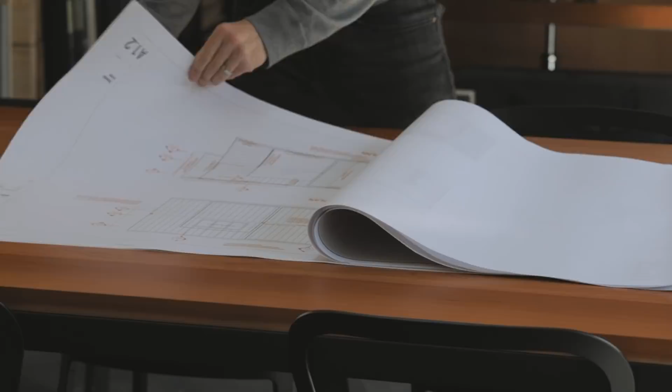I'm a sole practitioner, which means I'm responsible for everything here, bringing in new work, processing that work through the design process, completing it, and all the meetings, emails, invoicing, all those things fall under my responsibility. As a sole practitioner, you have to maintain this kind of careful balance between new work, work that's in progress, and work that's finishing up.

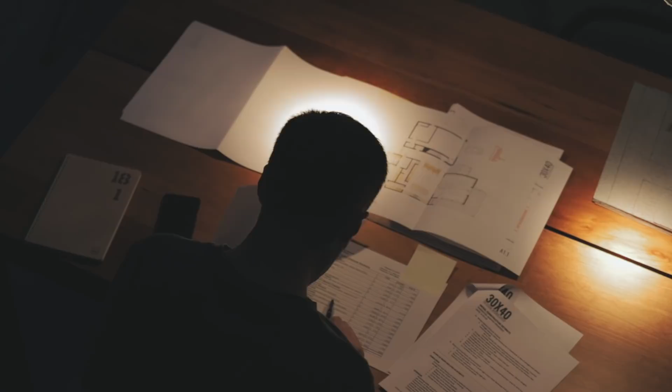When there is creative work that's extrinsically motivated, that is work that's commissioned by others, external to you, there's a natural cycle to that work. People will delay projects. Financial situations will change, personal situations will change. And if your entire creative life is tied up in those extrinsic motivations, when something is delayed, you'll need to fill that hole in with something else. And that can be a struggle.

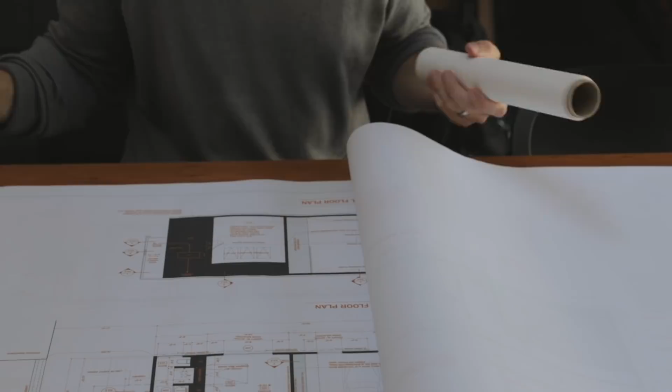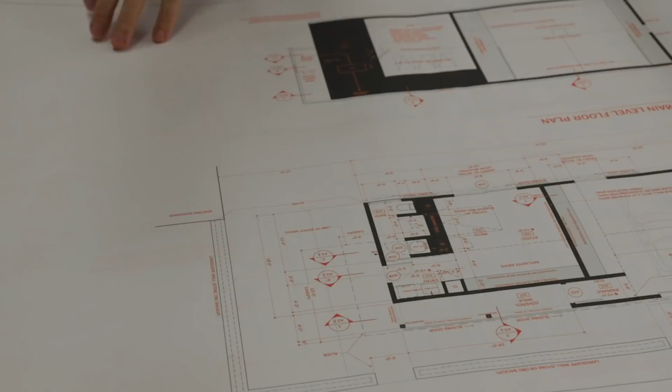So finishing up this barn studio project, this is actually going into construction right now. They're casting the slab this week. So we had some framing members to figure out, some coordination to do on these eave details here. It was done as a schematic set, and we now have to figure out what some of these details at the corners are. So it's not uncommon to do a set of details for a schematic or design development set of drawings and then have to return to them to do some additional detailing.

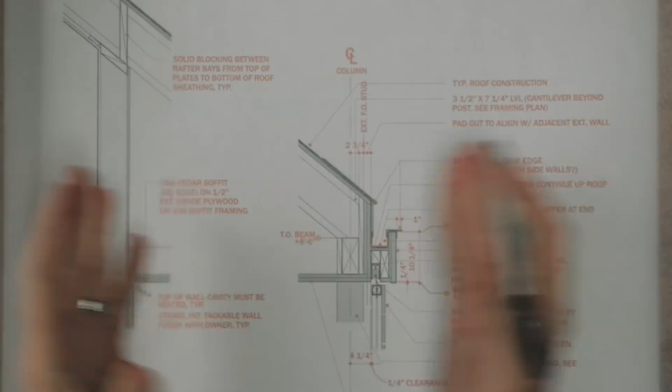And this practice is called detailing because it's describing all of the parts and pieces and materials and components and dimensional requirements that the contractor is going to need to actually construct the structure in the way that you're intending them to. So if we just return to the drawing set here for a moment and we look at a framing plan for this particular area, it's right in this zone in here.

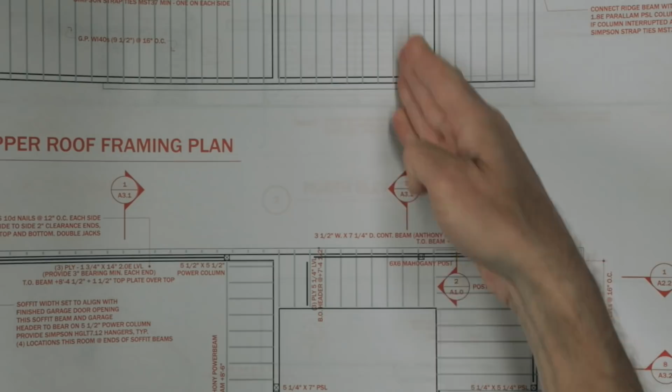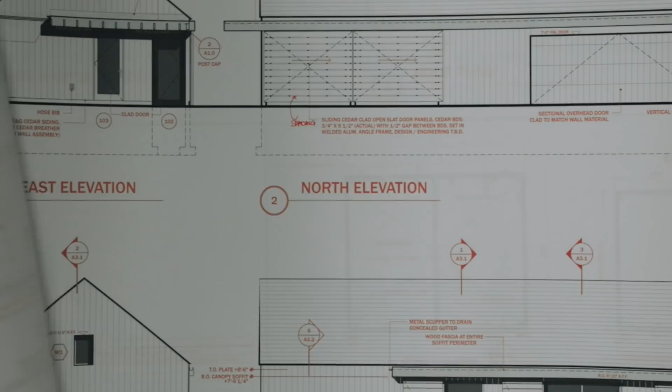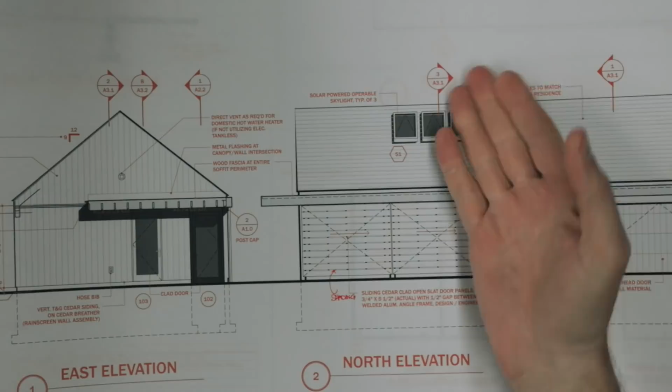So if we come over to this elevation right here, if we're cutting a section through here, we have some sliding barn doors, we have a fascia here, we have roof shingles that are turning down to a vertical wall, we have cedar siding, we have a covered canopy. So there's a lot of things happening in this zone that is not apparent until you go into a deeper level of detail. So the purpose of this detail is to basically say, okay, these are the parts and pieces that make it up. But detailing is also a process of figuring out sequence.

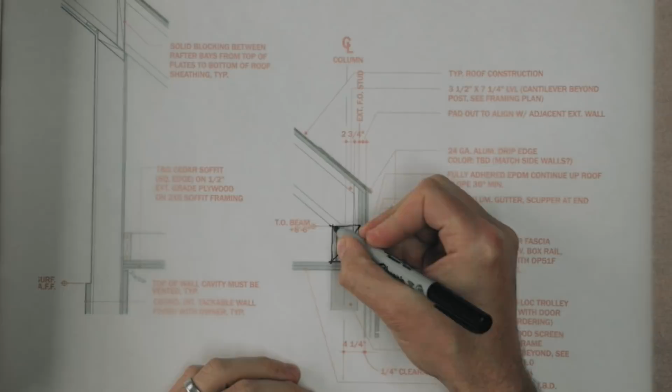So sequence-wise, from a construction standpoint, obviously we're going to be starting with the foundation and then we're moving up here into the rough framing. So the first thing that's going to come in this section is our structural members that are going to form the shell of this building. So we have a beam that's making up this covered canopy. We have a post that is supporting that beam, and we know exactly where that's located because we've located it on the foundation plan.

Then we're going to come and frame our roof rafters on top of that. That's going to sit on here. These are engineered framing members, and this is all light wood construction, so it's just sticks essentially. Over here, these are hurricane ties. And then we have some blocking here. So blocking in a section is just essentially a piece of wood.

It's a 2x6 or a ripped 2x10 or a ripped 2x12. It's basically a piece of dimensional lumber that the contractor modifies to fit the current situation here. We're going to describe what the roof slope is. I think it's 9 and 12. And this subassembly here is going to be in place first.

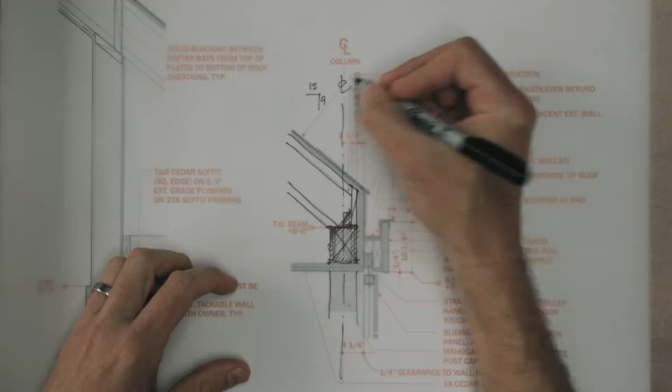Then it's a matter of figuring out, okay, well, what relationships do we want to show? So in the elevations, we have this roof system that's sloping down, that's our roof system here, and then it turns vertically here. And then we have this fascia piece that comes along. And this fascia piece is meant to conceal a barn door track.

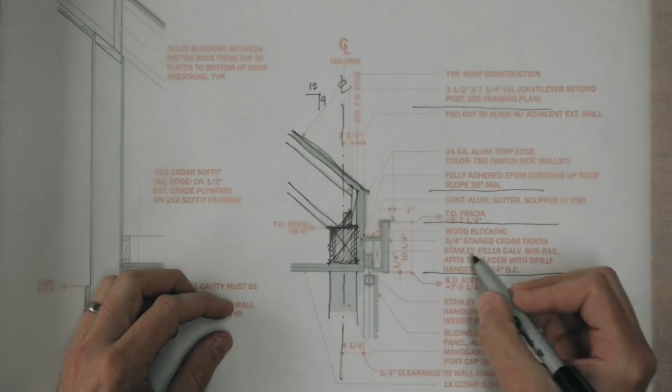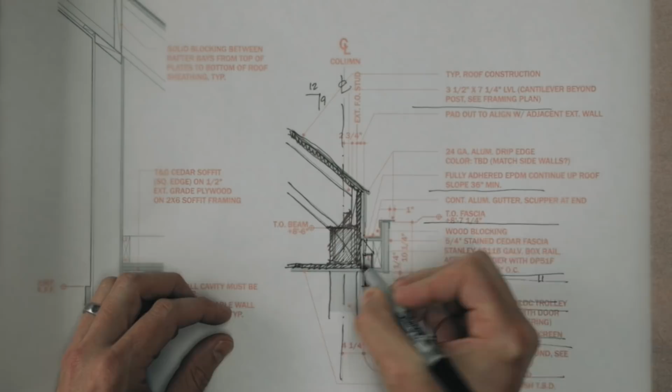So where do we mount the track? Well, the track has to mount to something that's solid. So we're basically going to be sheathing this building with plywood or OSB, as it may be. So that's the next layer that happens. This plywood gives it rigidity and strength, and it's also a substrate that we can attach all of our finishes to.

So we have the post and the beam, we have the roof structure, we've now skinned it with this plywood skin, and then we're gonna come and attach all of our final finishes to that. So we've got a vertical cedar boarding that's coming up, and we have to vent all of this siding. So we're gonna leave a little gap here.

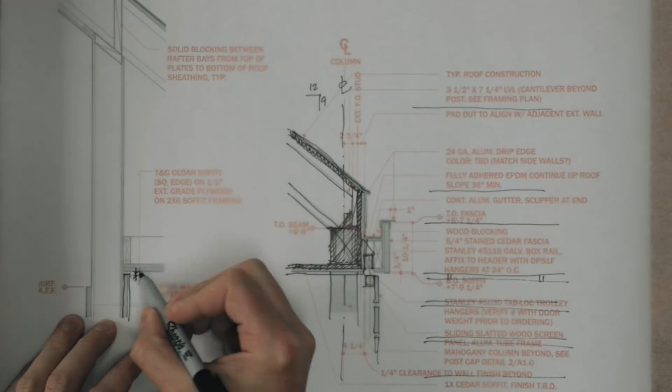We want the cedar to continue across the soffit. That's what this is right here. And it'd be nice if this little gap showed itself on the column here, because we're gonna have a wall on this face that's continuing here. It'd be nice if the column had some sort of a reveal to reference that. So we're gonna call that reveal out like that.

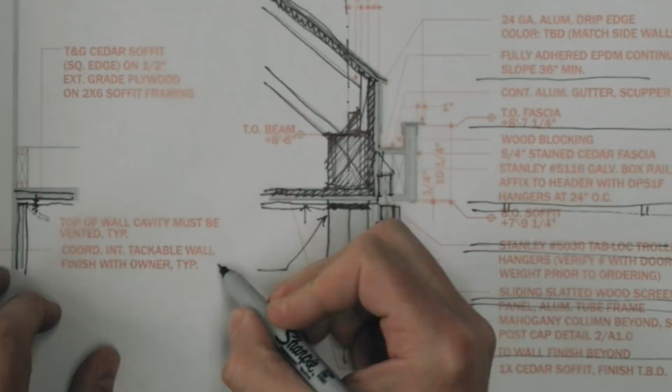And there's probably a detail note that says, 1/2 inch reveal, kerf at column top. So there's that. That's kind of a nice detail. So that's something that we need to figure out, that we need to specify. Otherwise, the column just goes up and it meets the underside of the soffit assembly.

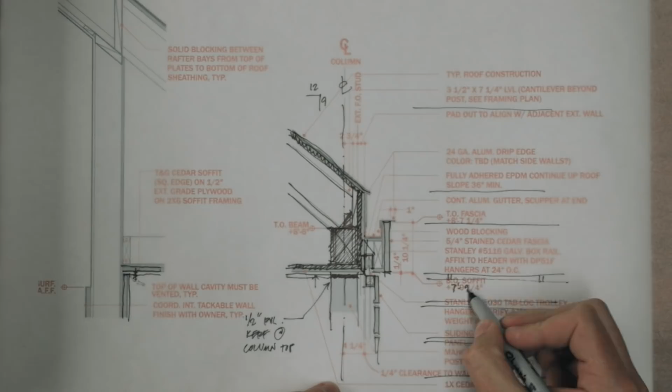Now we want this cedar to return to this zone in here so that we don't see any end grain or any joints here. So we'll miter that corner. Then we have a cedar fascia. Now to get this cedar fascia aligned with the soffit, we want to be calling out the location of the bottom of that soffit, so the contractor knows, okay, that's where I need to locate that.

And in order to fasten this cedar in the end, we need some wood blocking in here. And because this extends above that wood blocking, we're going to need probably some plywood, something that's a little more rigid in here. And then we're going to form the bottom of our concealed gutter. We're going to make this out of plywood, and then we're going to have our EPDM, our waterproof membrane, that comes up and over, and it forms this sort of bathtub in here, and we'll extend that up onto the roof.

And then we have our metal drip edge that's coming here, and we want to lock that in with a vertical flashing piece that comes down here. Roof shingles. We've got a coping piece here that'll get locked in there. And each one of these parts and pieces we're going to call out with notes.

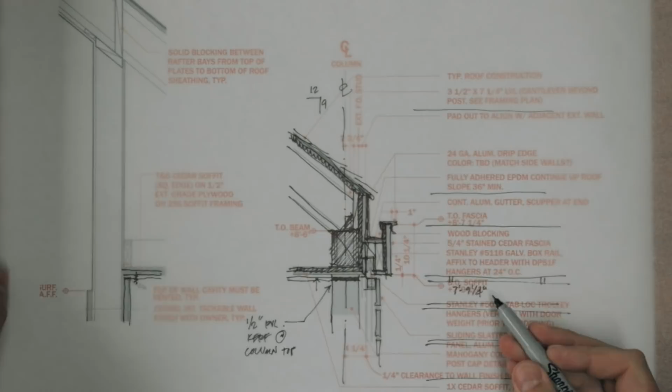So we have continuous aluminum gutter, we want a scupper at the end, we have 24 gauge aluminum drip edge, what color it is, and you can decide to note it in here or note it in the specifications. This project was small enough where we didn't have a separate set of specifications, so we're actually calling it out on the drawings.

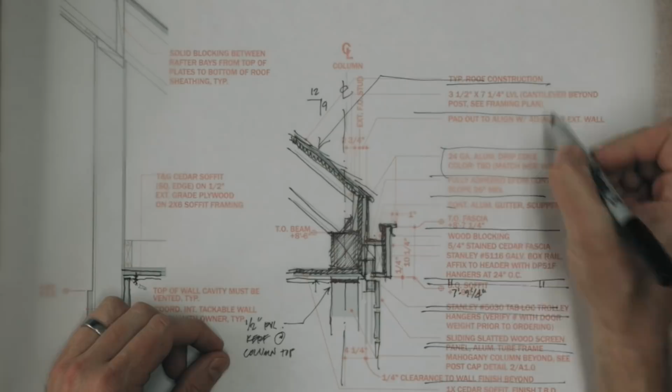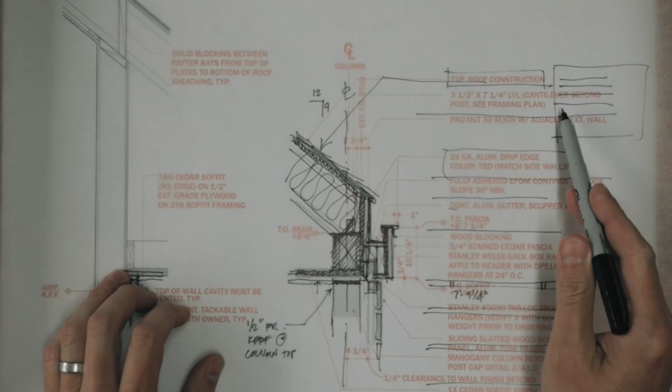Another good practice is, if you have common roof construction, we're going to say typical roof construction, and then elsewhere on the sheet, we're going to describe what that is. If you make a change to any one of these components in the typical roof construction, say we decided not to do spray foam as the insulation in the roof here, maybe we went to blown-in batt or something, that note then gets changed in the typical roof construction rather than changing it on 30 different details.

During my hike today, I was listening to Tim Ferriss's podcast, and he had on Joseph Gordon-Levitt. He talked about how after a series of rejections from people who thought he wasn't capable of producing a film for Cannes or Sundance, he just decided he was going to hit the record button himself. Creatives are coming to this realization now because the internet has made publishing your work infinitely easier than it used to be.

Joseph Gordon-Levitt started a site called Hit Record, which plays on the words hit record and hit record. One is the object, a hit record, versus the action, hit record. Hitting record is the act of pushing the record button on your camera, or whatever self-publishing mechanism you're using, and having the courage to step out on your own, make something, and put it out in the world—to be criticized, to be loved, to be hated.

That's all part of it as an artist, as you know. When you work and live in a place like this, which is pretty isolated, those outside influences can have a big impact on your business and how you move forward.

It's raining, I'm gonna get out of here. It's still pretty beautiful, actually.

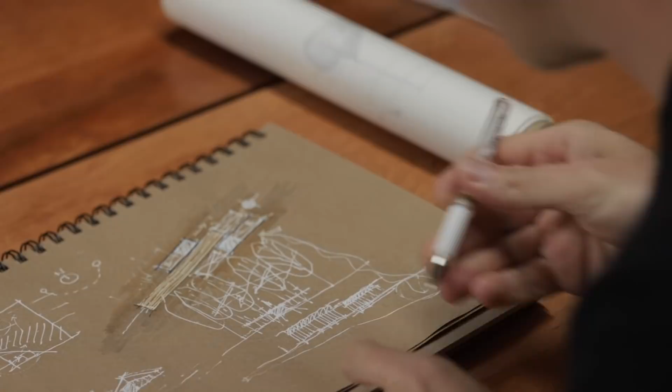I hope this is inspiration for you, and permission for you to go hit the record button and publish your own work. Find the things that intrinsically motivate you to be a creative person, to live a creative life, and go out there and make things.